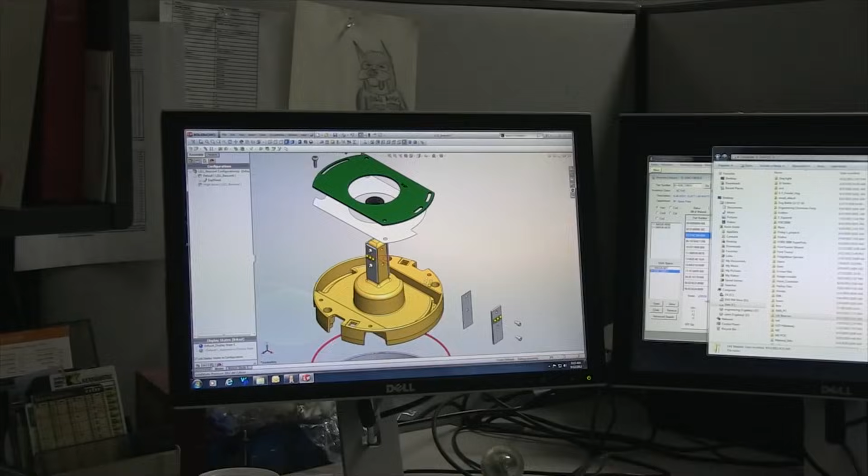Today I'm going to be looking at this particular part right here. The vendors requested a change in fillets to the areas, so I need to import a new circuit board into this assembly. So what I'll be doing is going through the features of this part to modify it to make the vendor's request. Then as I go back to the assembly, I need to match up my circuit board to that assembly and make sure everything fits fine with his requests.

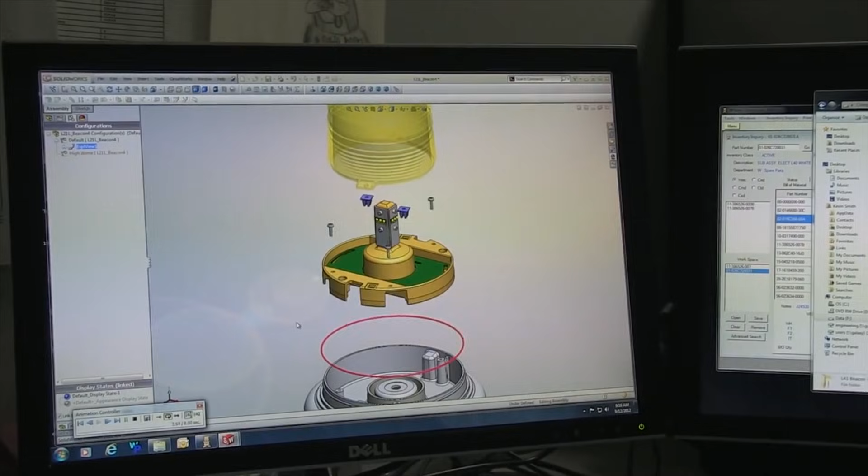So basically you'll generate these drawings and then send them out to, what are you saying? We generate the drawings, we generate the 3D file, then we send that to our tool shop and they actually make the tool for the product. Once we're happy with the tool design and the tool, if it's a die cast part, we don't do die casting, we'll send that tool to the die caster. Right, and they'll actually put it together then. Yeah, they'll make the changes as requested, but the original design came from here for the tooling.

And we can also relax the part so we can show it folded and flattened. Then we provide that to our sheet metal fabrication facility, and they can do the flat pattern layout of that so they know where to make all their cuts, where the bends occur, and then we can again show it in formed state. That's what we're working on right now.

This is exactly how the PC board will look before it goes to the board manufacturer. You're putting all the different components on the board with respect to how it'll be positioned for the tracking. That's true, that's very true.

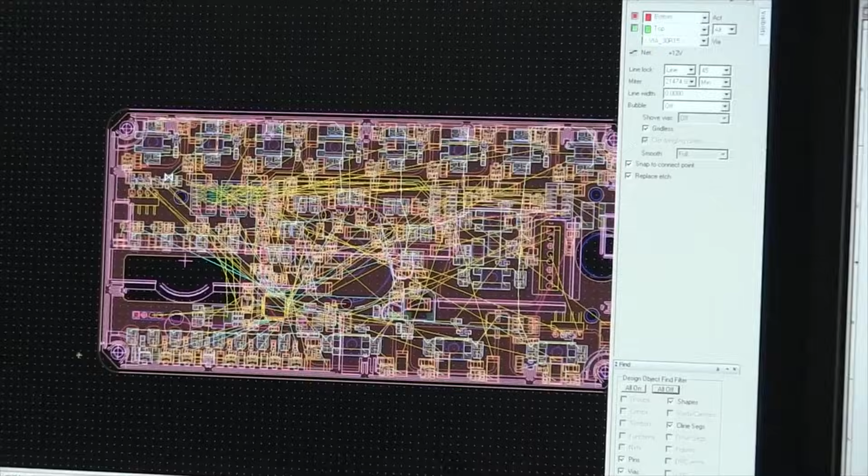So this is the actual component that has come out from the 3D printer.

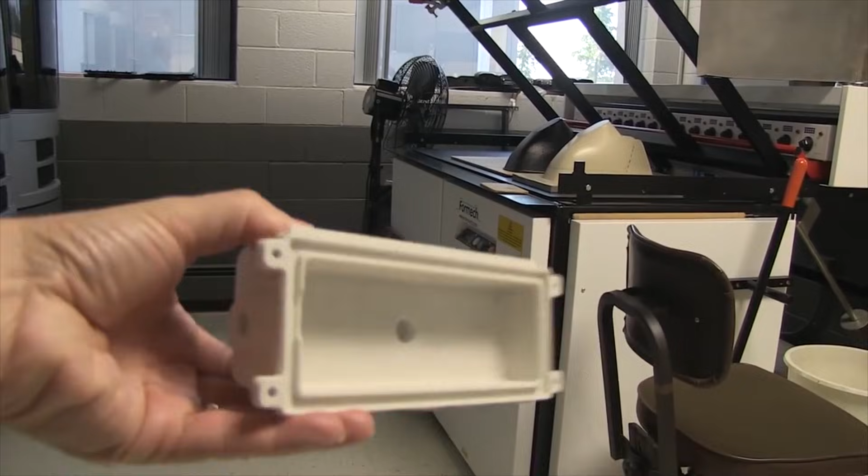And that then in turn goes into this machine over here. They're two separate machines, that was just a view of the powder for you. So basically what it does is it prints a 5,000th layer, scrapes it off, puts down glue, puts another 5,000th layer, glue, another 5,000th layer, so it keeps building this part up. You can imagine the part just being built layer by layer, 5,000ths at a time.

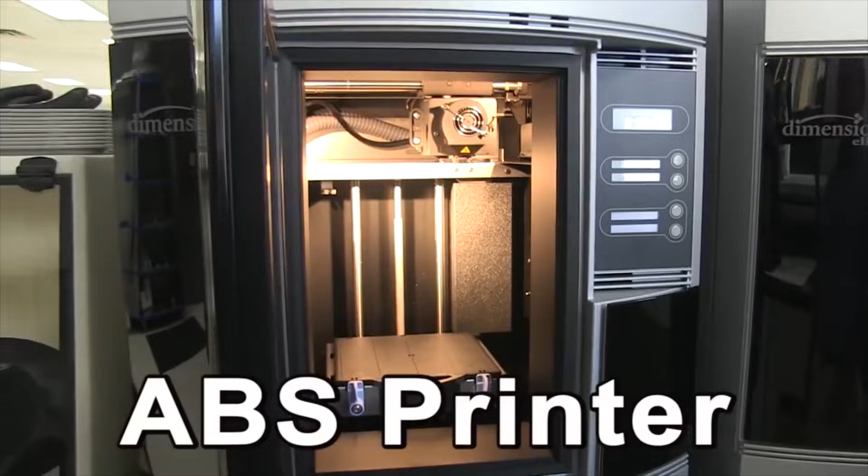This is a life test room. So basically in here, we're testing the longevity of every single Whelen item. We test to see how long LEDs last, how long circuits last. Some of the stuff's been on test for 10 years - some of these have been running for 10 years constantly.

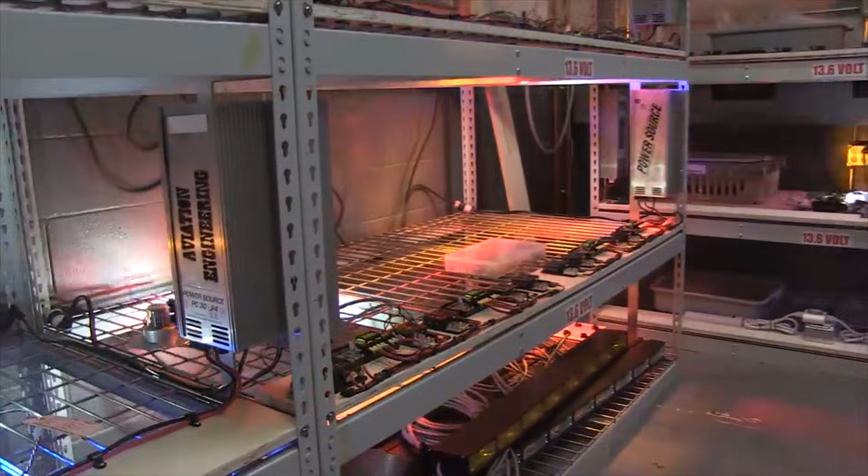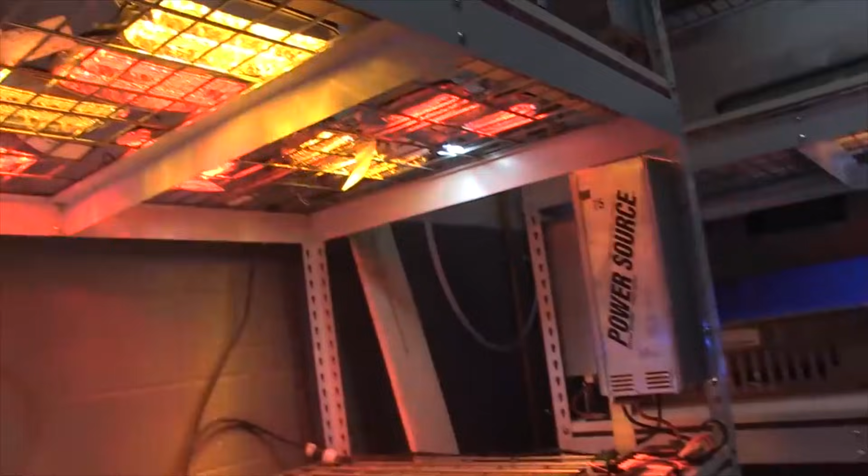Okay, this is an integrating sphere. It's used to measure the color and the light output of the light source. We can measure in infrared or in the visible spectrum.

And what type of product is in here right now? What do we have in there? That's just one of our circuit boards - I'm not even sure, it's one of our LEDs.

You're measuring, as I just said a moment ago, the blue, is what you're going on? Yeah, here's the data for it. So on this graph here, you're looking at the intensity or power versus the actual wavelengths, covered in the visible spectrum. And this chart here will show you whether or not it's compliant to any of the CIE colors - these boxes right here, and it shows that it's in the box. Not directionally, since it reflects everywhere you gather every single bit of energy. That's kind of cool.

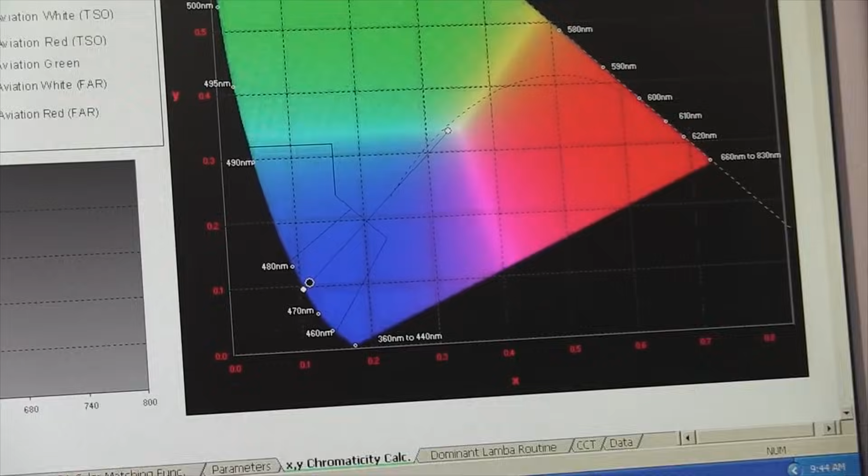All right, this is one of our photometric chambers. We have a light set up in here right now, it's one of our light heads.

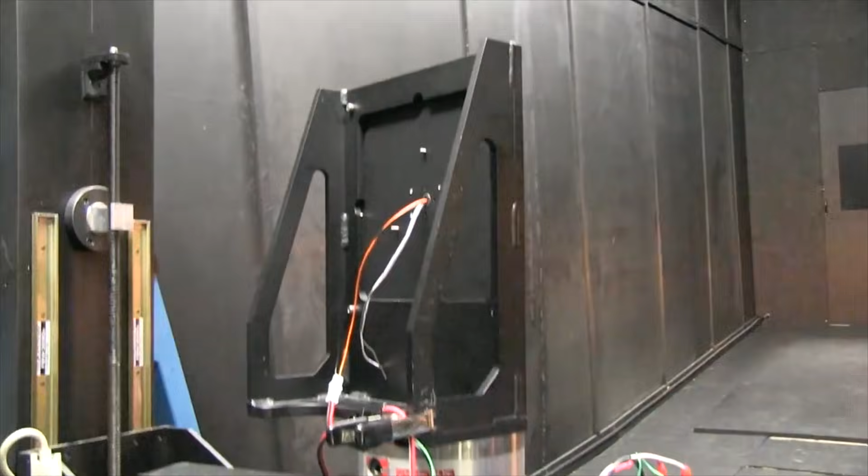This is a goniometer - it's a positioner, and the light is mounted. There's an X and a Y axis, and the center of the light source spins about those axes, and the detector is 100 feet away through those baffles. So we're measuring the light intensity versus angle.

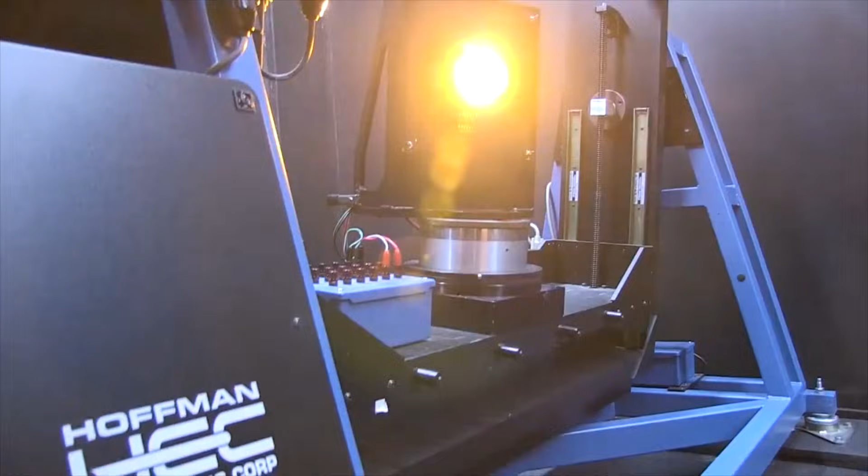Standard environmental control, humidity, temperature, all the environmental controls in each one of these. So in other words, this room is certified with respect to the testing that's going on here, and there's very strict rules on the certification. So this is what we're seeing here on the computer screen of what we've just been looking at inside, and it's toggling back and forth.

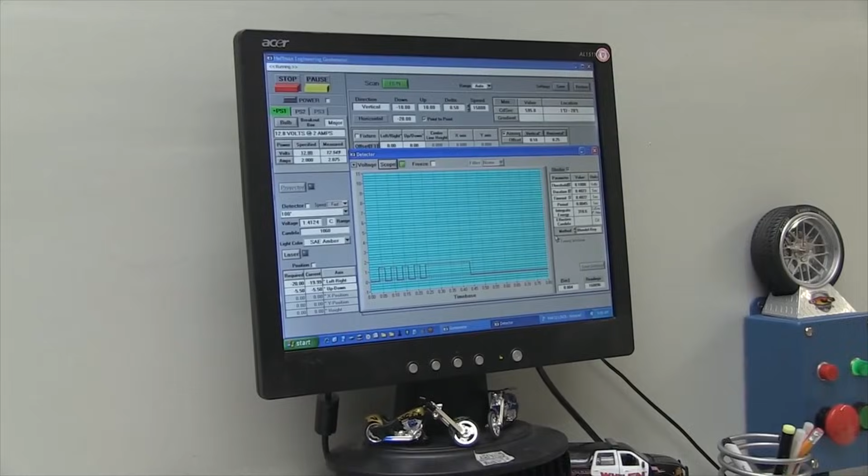This graph right here, the line graph - that's going to come back. Right there is the intensity versus the angle. And then this graph is similar to an oscilloscope, it's measuring the light intensity versus time. So you're actually seeing the wave of the flash.

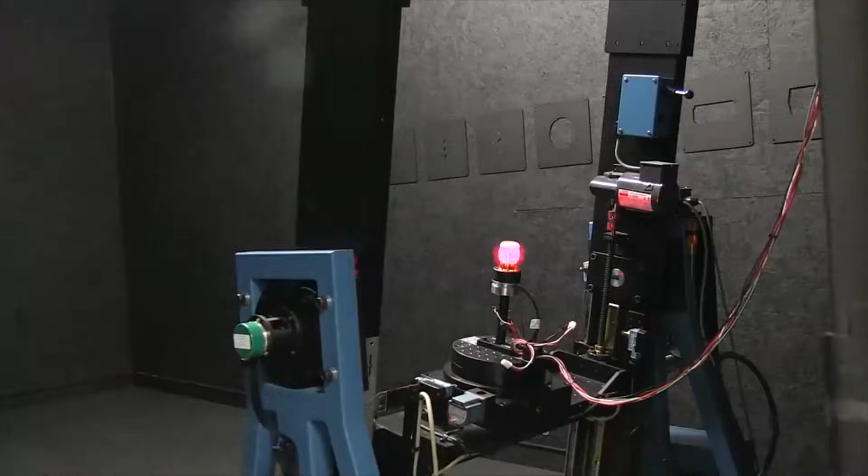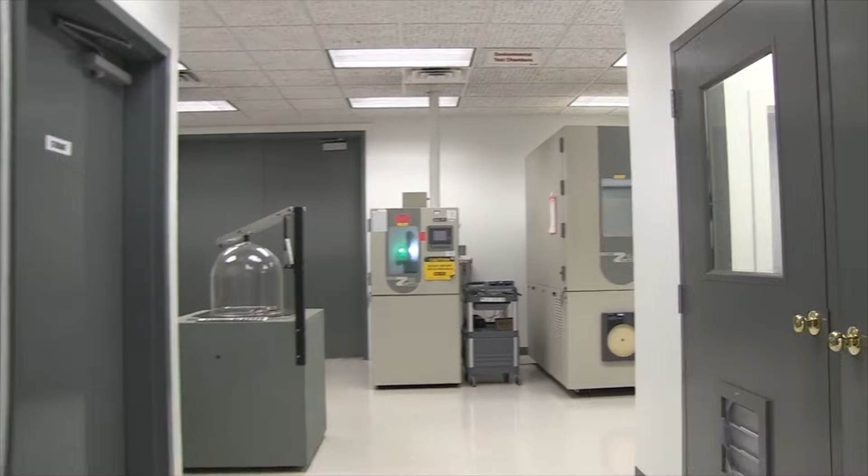So we're down in the underneath section here at Whelen, and we're going into the other test area. Now this is where they do environmental testing - there's a whole range of equipment in here. We'll take a quick look at some of these right now.

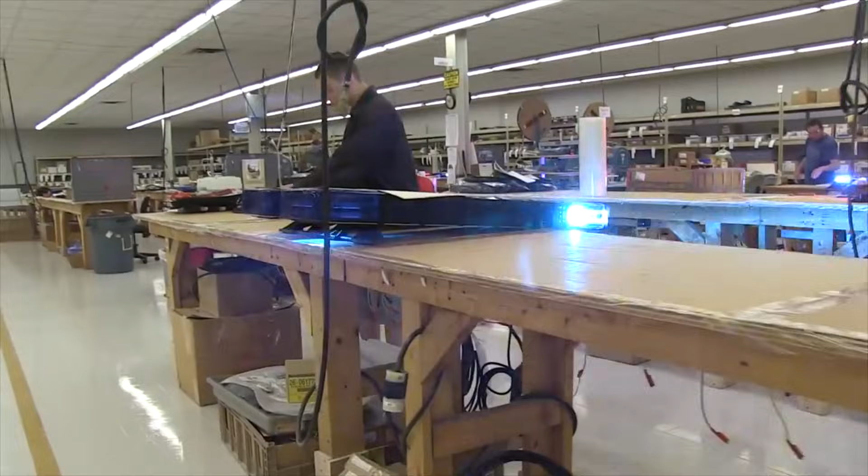So basically down here, this is the light bar production area at Chester. This is where you make runs less than 50, because obviously up at the New Hampshire plant, you make runs over 50.

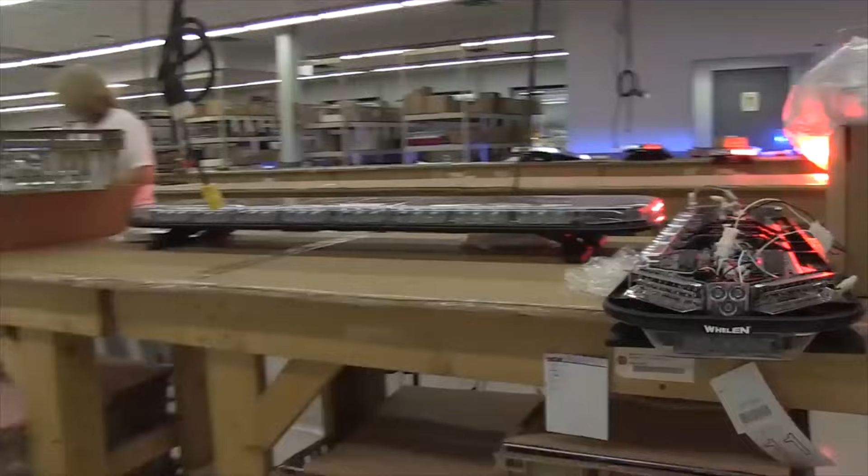Justice bars - so again, all the justice bars being put together here for a particular client, and then obviously out the door they go after that.

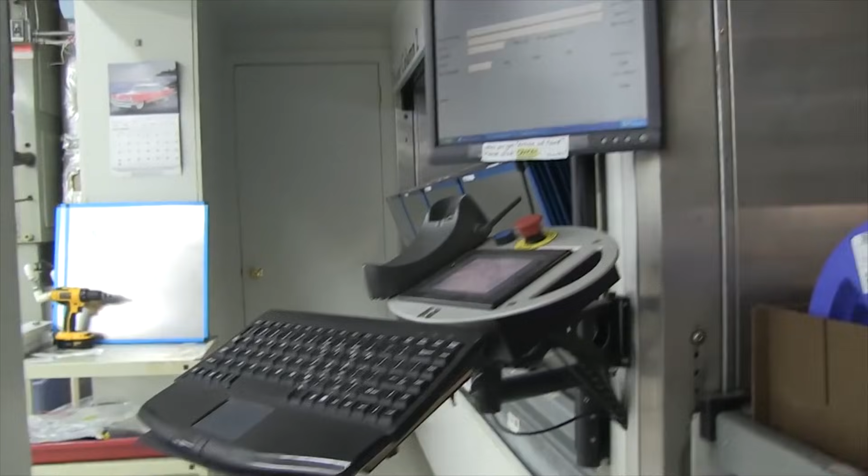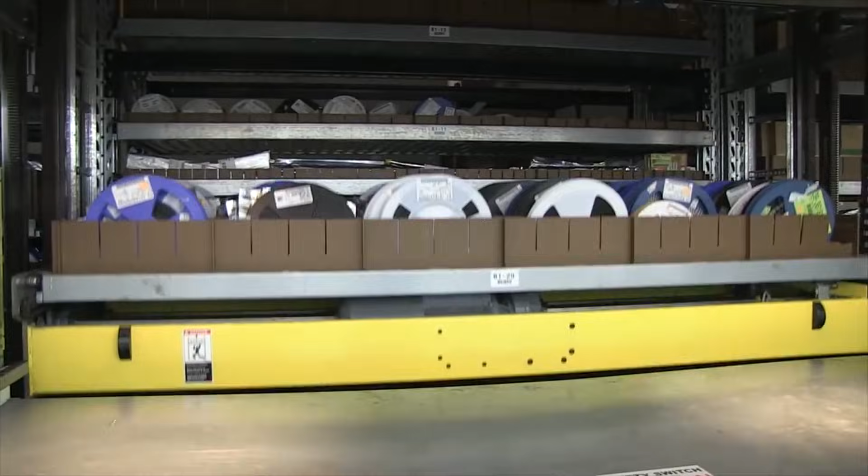Program here what you need, and it pulls it down from the rack. Yeah, you just scan a part and it goes in our system, and we'll bring up whatever we have in stock of it. We hit it, it'll bring it to the best location. It tells us how many quantities there are, different bins - very organized.

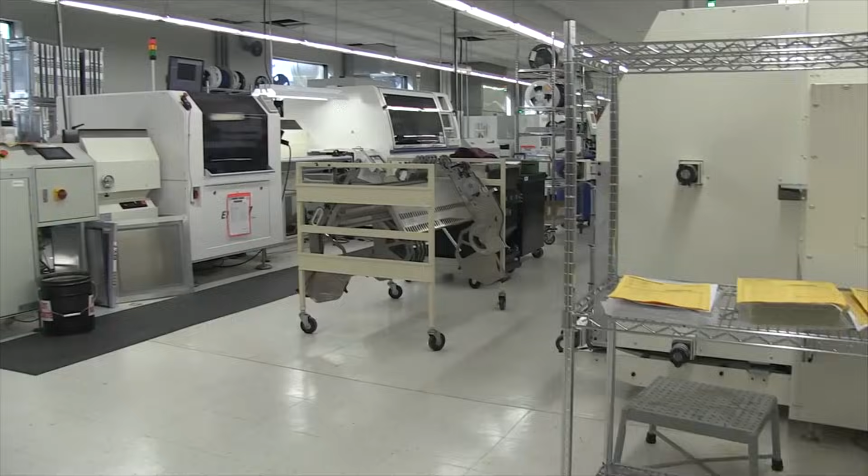So this line is all new? This one's a little older. This one just got replaced - brand new.

So this is the repair department and customer service.

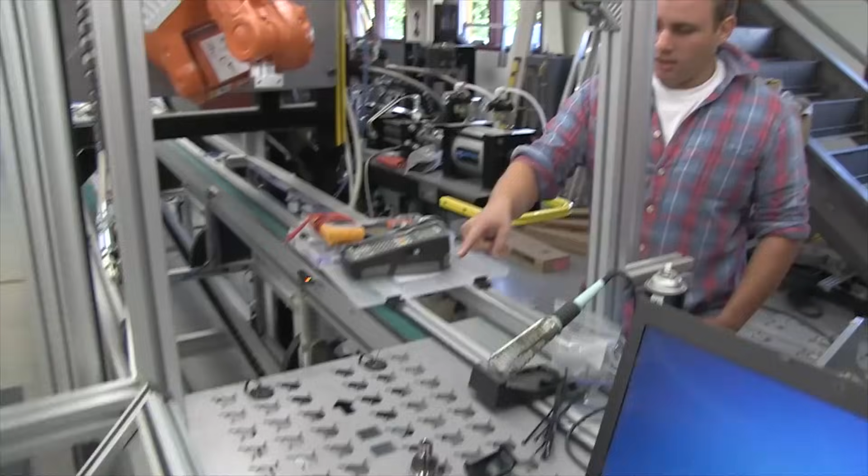These are for the Vertex. Right now we're using UV cure material, but we're changing it up a little bit. It's going to come through here. We're using these PVA machines now with a 3-axis type setup, like a box. We have one in here.

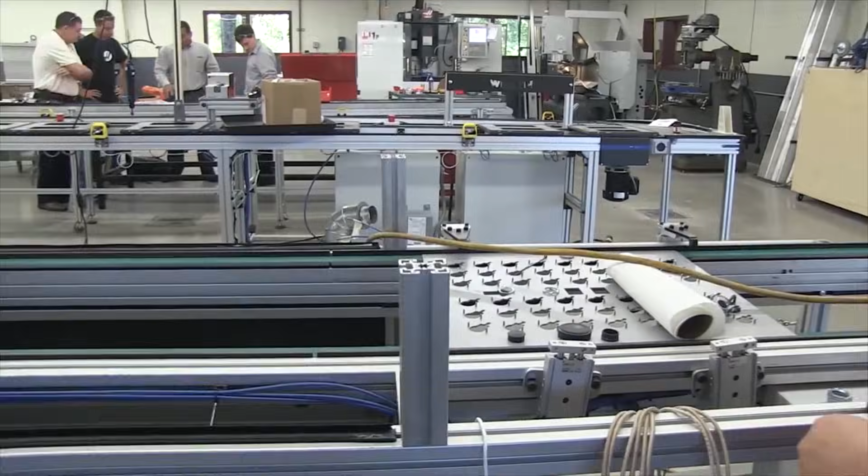It fills in, fills the back. So it's actually the same stuff we use in the PTWs.

The other robot will come along. It's brand new. We've only had this a few months. It's the only one - there's only 2 of them in the country.

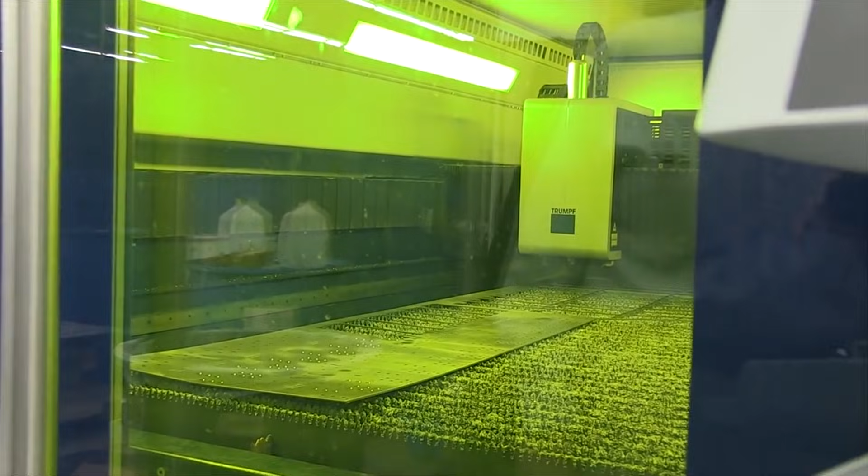So what are we having done over here, John? Same thing, going there. Yeah, we have duplicates of every machine in the place, in case one goes down for maintenance, we keep going.

The lasers I showed you at first will not do tapping and punching - that's just flat sheet cut. This is where we have to punch holes, tap holes, and then cut them out. So it does 3 operations.

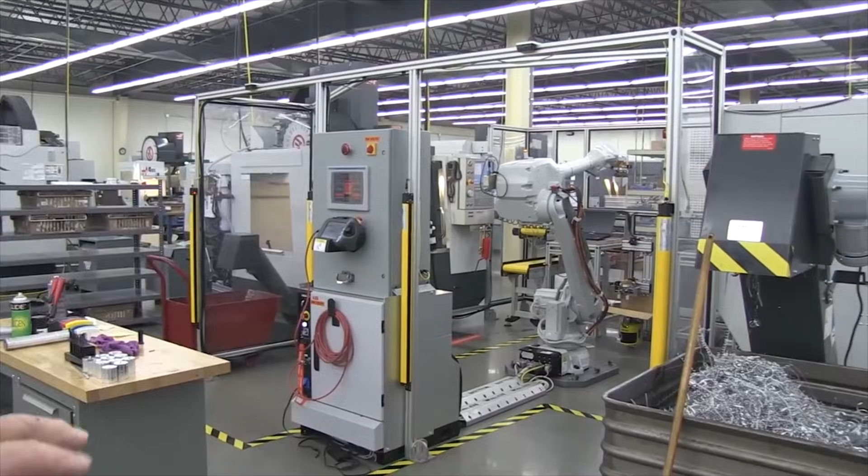Here is a creation of my engineers. They mounted a robot between a lathe and a milling center. It takes material, comes into the lathe, does its thing, cuts it off, the robot puts it in the milling center, it does its thing, it's all done. And it goes out the conveyor and we can use it right away.

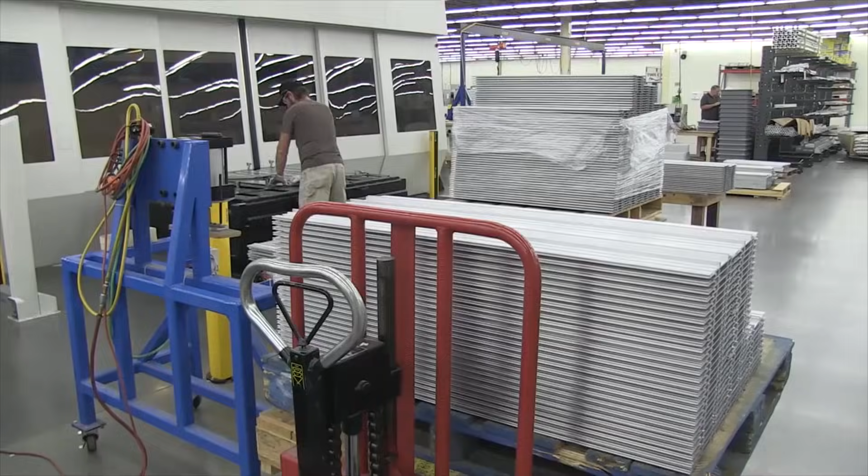And that runs all weekend with nobody here. When it opens up, this does all of the light bars, bases. Punch all the holes in it? Cut the holes - that way we don't have to keep greasing.

You can walk in there.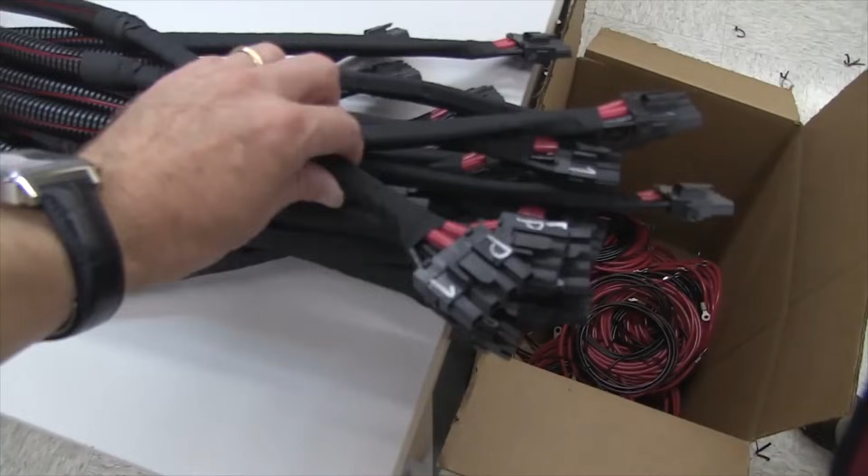Not exactly how many, but they're gradually showing up more and more.

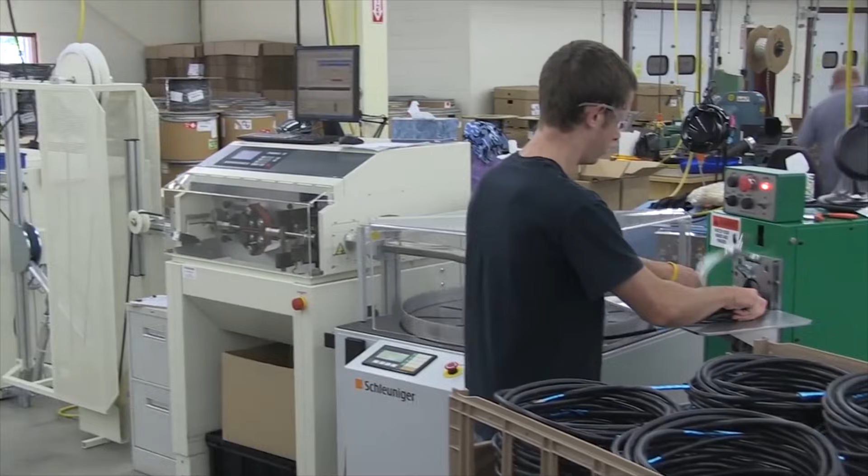There's a lot of things that are no longer - you just can't do things like this.

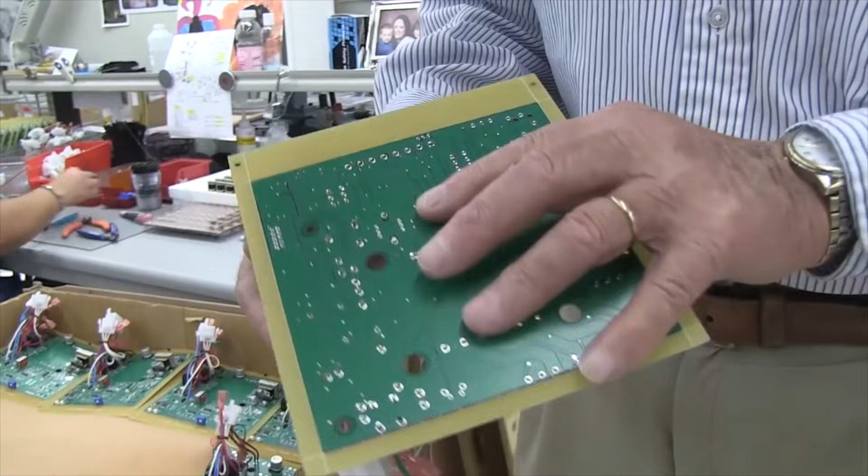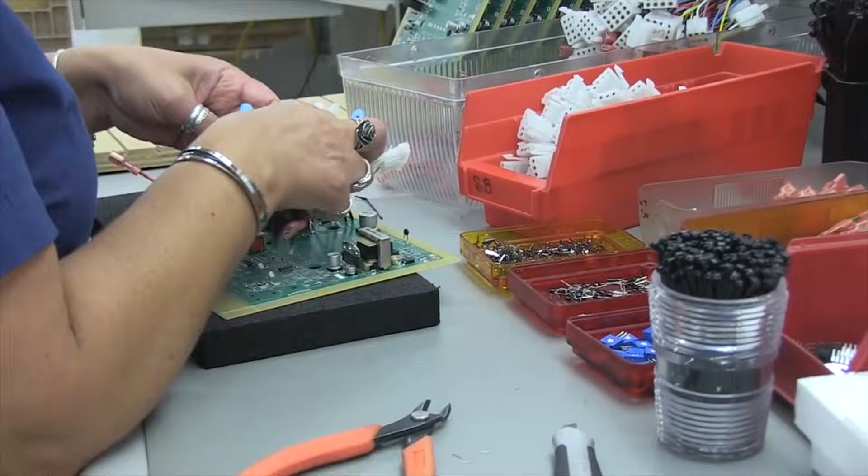Do you make your own PC boards? Yes, right over there. A stack of PC boards goes through this machine here, and it silk screens, so to speak, prints on the solder location.

Puts the solder paste on - very thin. Then it goes down and it goes into the insertion machine.

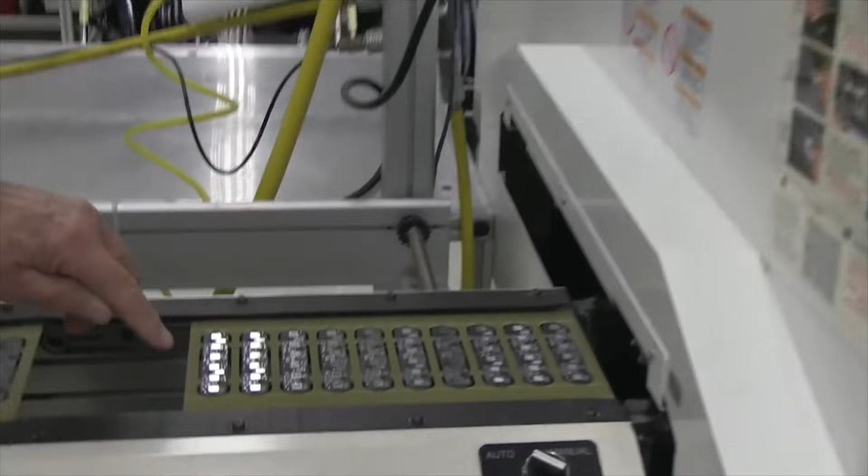This has already been pasted on those silver blocks. Then it goes down here.

And this machine is picking up, called a pick and place machine. It picks the part off the reel and puts it in the right spot. All programmed - we can do up to, well, you can see how many reels we can put on. I think we can do 40 in each one, so we can put a lot of different parts on before we have to run the board through a second time.

And that's the component parts there - the diode or the resistor or whatever. Yep. The only thing this machine doesn't do is what we call power parts, because they're the big parts, the big wires.

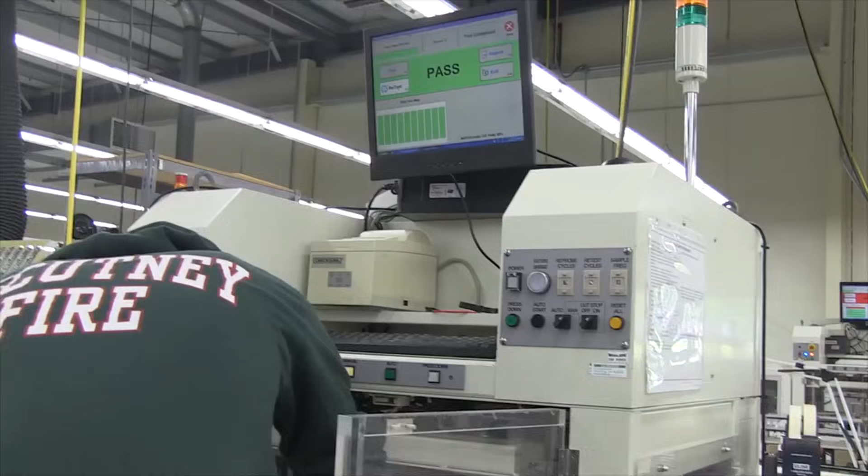Yeah, go ahead. See a little bit better?

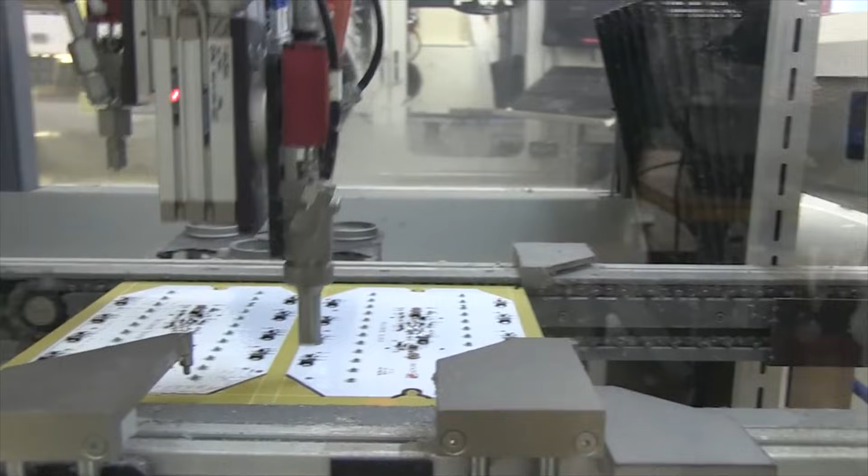That's spraying or coating, just to protect the coating. It's the goo machine. Then it goes through an RF oven and out.

RF - radio. You can see the coating from this angle. Right, it just goes into the big thing.

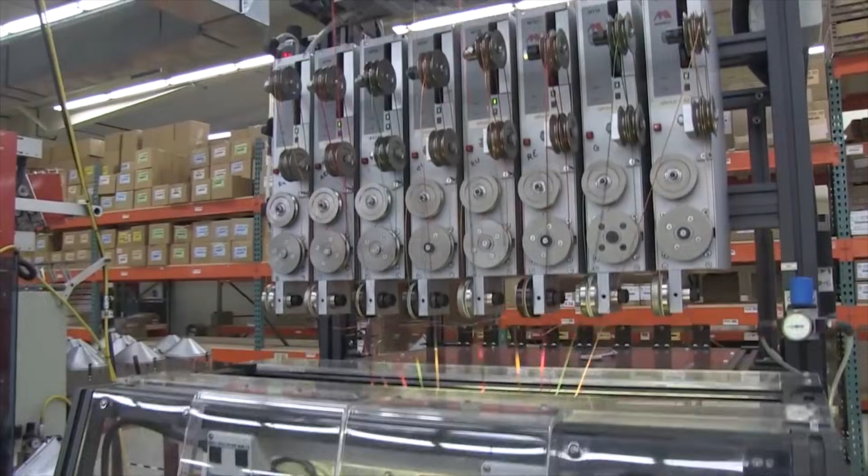Just to identify the coils. There's multiple - in this one here, there's 4 or 5 different coils in there. One live coil, one power coil, one control coil.

Can take it out. Thank you.

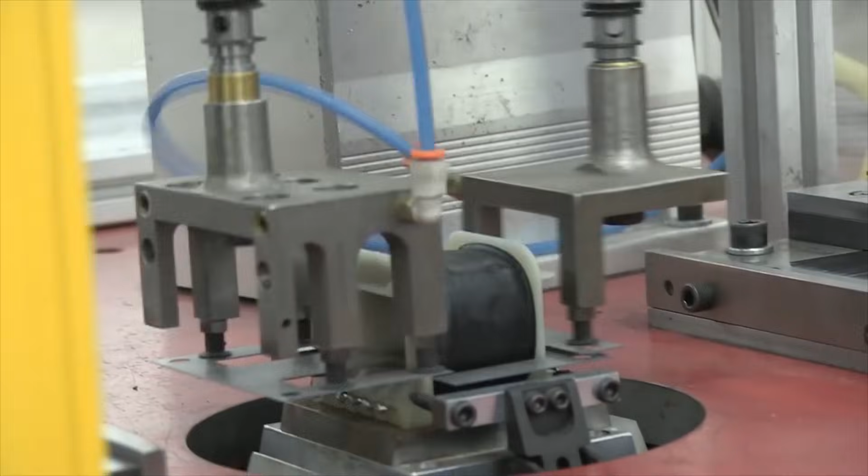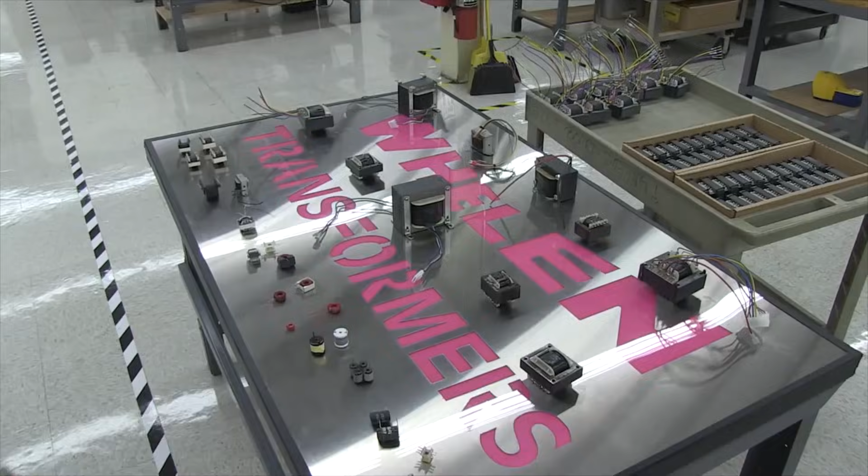Here's the tiniest one we make, and here's the biggest one we make. We're also making toroidal transformers, and I'm not sure anybody else in this country makes them. So we have a toroid winder.

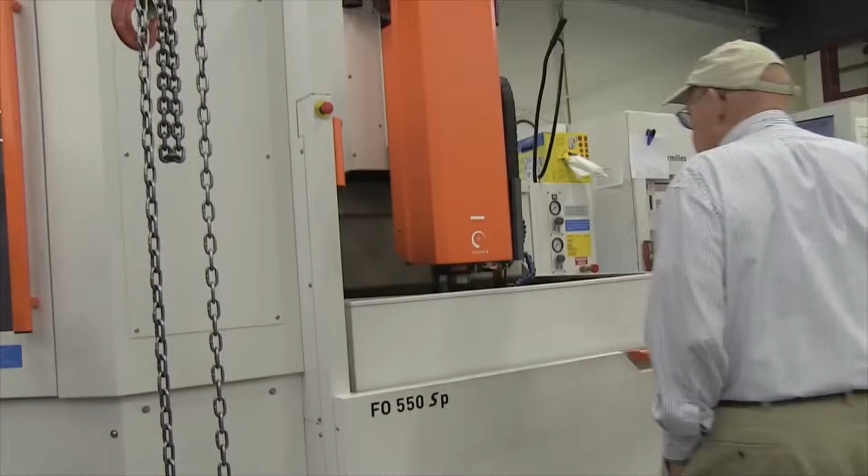Moves up and down, and it burns whatever shape you want. Yeah, I want to do this exact shape, which would be difficult to do otherwise.

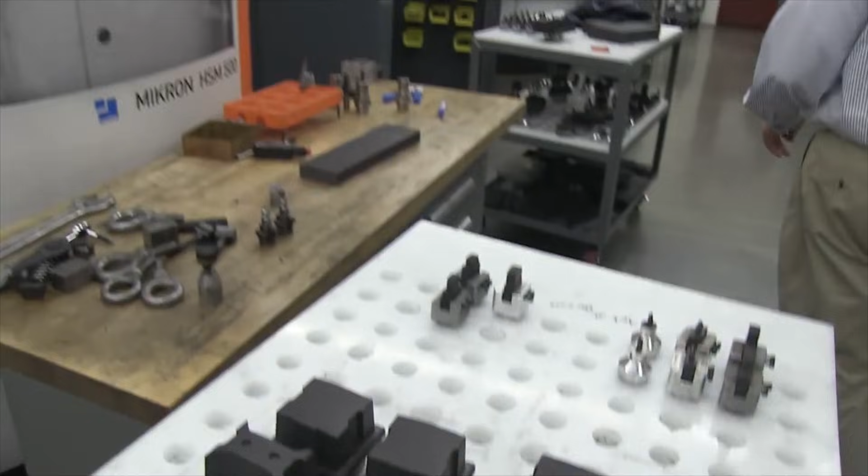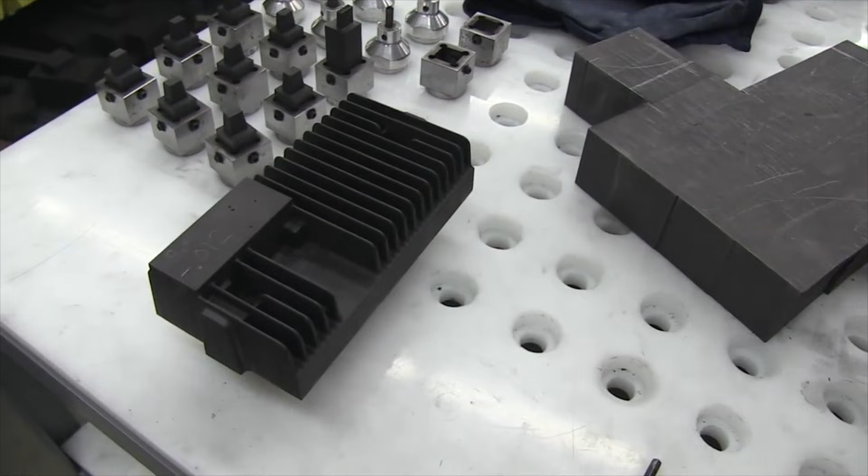So you rough them a little bit, then you sit in there and 24, 36 hours later, it's burned out. And you cut the stuff out of carbon.

This is one that uses the brass wire - miles, hundreds of thousands of miles of little fine brass wire, and it cuts like a saw, but electronically. Best description I can give.

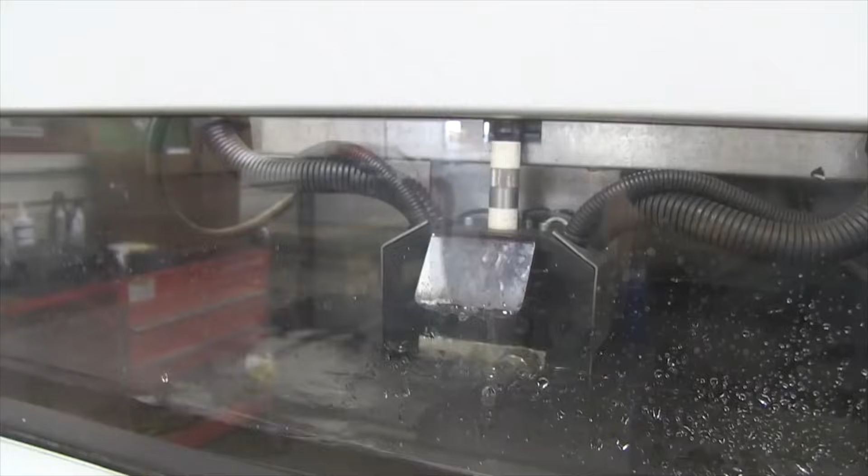We make our own die-cast mold here. All our own die-cast mold. This is the grinding shop.

In here they do the few thousandths of an inch worth of work, making sure the tools are incredibly accurate. Checked out, repaired, and then it goes back with a green tag, back on the shelf. So a guy goes over, gets his order to run a certain tool, he knows it's ready to go, rather than thinking, oh my God, I can't run it today, I gotta get it fixed.

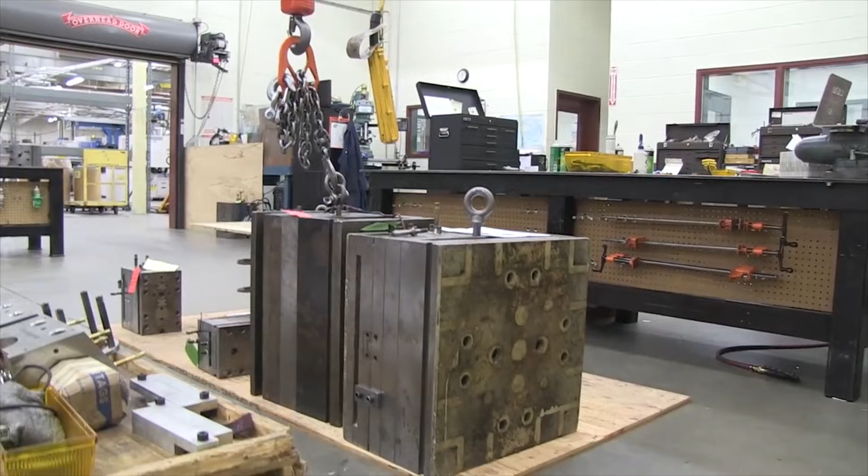And when they take it out, they open it up, find nothing wrong. Be able to recognize that tool. Yep, yep, that's a vapor type.

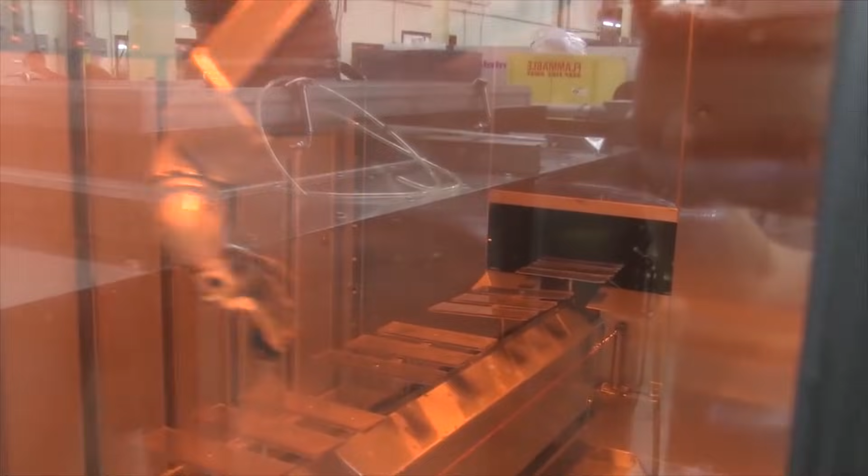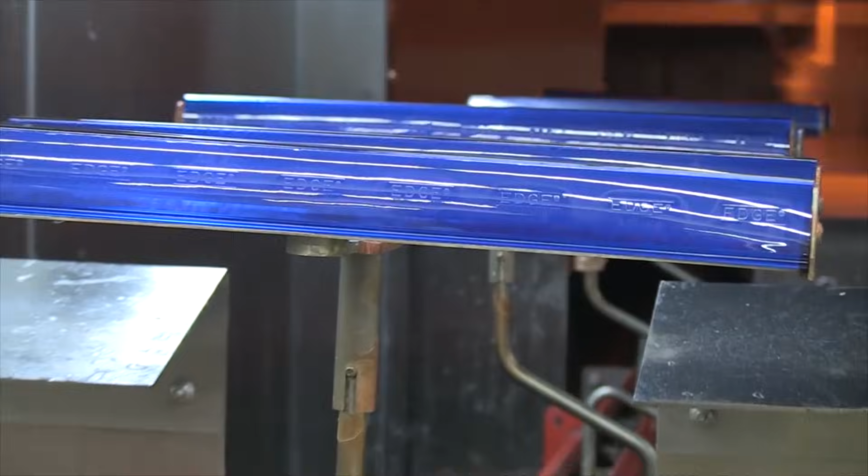Barrel of material, 25 gallon drum. Every drop is recovered. Oh yeah. So it's rolling away to the bottom, recycled.

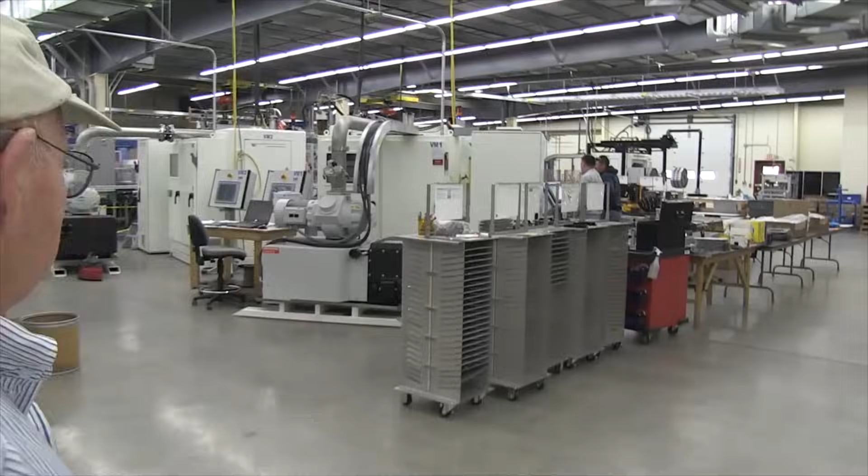What we have here, Stuart, we'll walk around, but this is an automatic reflector line. There's 5 injection molding machines making parts. The robot takes the part out of the machine, trims it, whatever, drops it on a conveyor, comes down here, lines up properly.

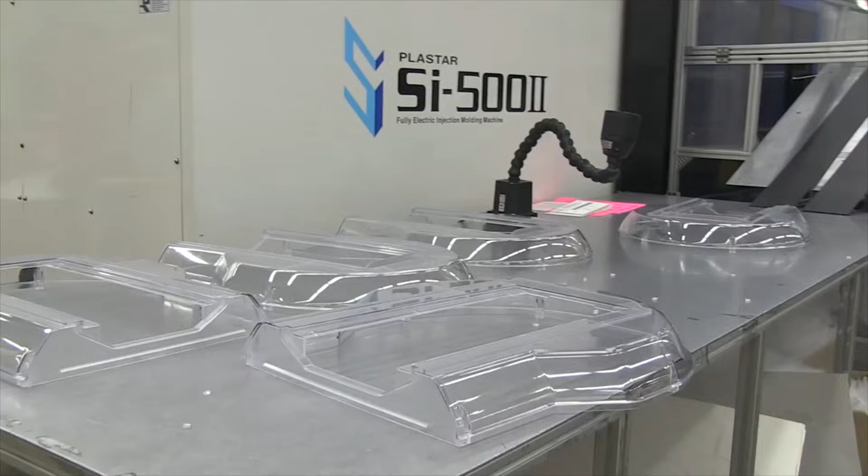This particular area here is where Whelen keeps all of the respective dies to manufacture all of the different beacon dome assemblies that they need. It's absolutely vast.

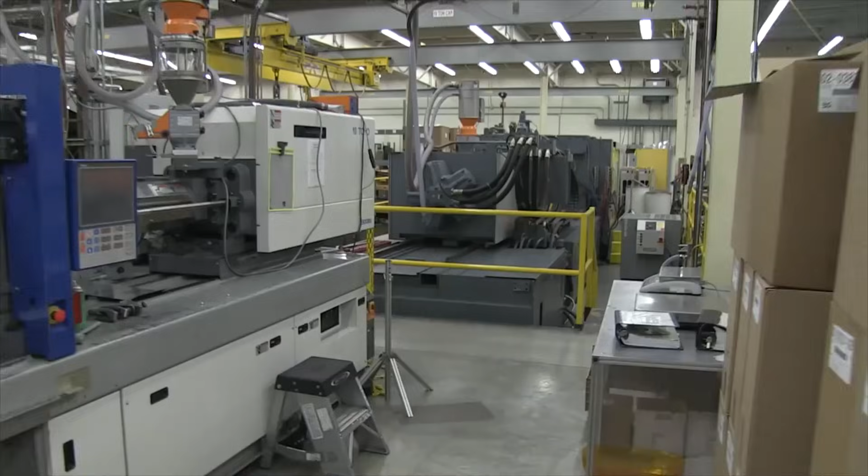Great one. Now what's this press used for? That makes shells and books and big parts. This is a total of 700 tons. 1700. Actually, they call it 2,000 ton machine. Now, tonnage is the clamp force.

Gone through this vacuum metallizing system, and this is what it looks like.

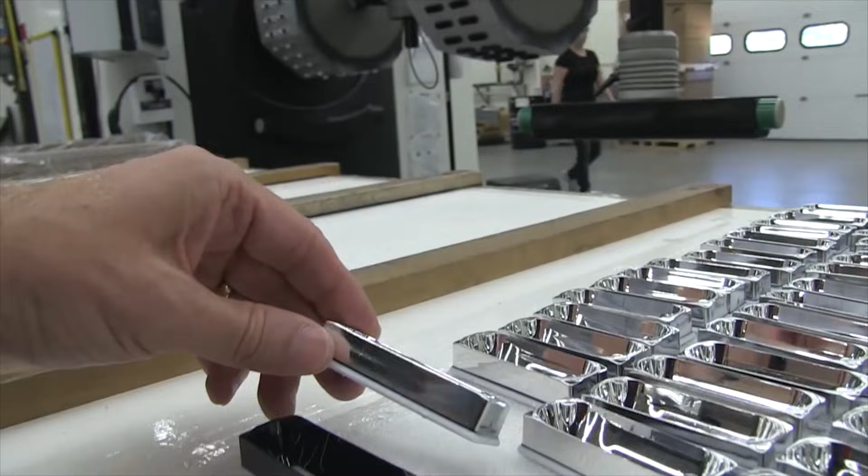Well, there you have it, a SIRENNET film of the Whelen facilities, both in New Hampshire and in Connecticut in the United States. Now, of course, Whelen didn't start as the mega corporation it is today.

It started as a very small family-run business. It's still family-run, by the way. But George Whelen and his wife Betty, in 1952, started a very small business out of a garage in Deep River, Connecticut, making aircraft warning lights. That's how they started. George, under some persuasion, decided to put that aircraft warning beacon into the police market. And as I say in the classics, the rest is history.

So they moved from that small garage to a larger facility in the 70s, also in Deep River, Connecticut, and then ultimately to Chester, where the large plant is today. That also, by the way, includes an airport, because they have outdoor warning, they have aviation, and they have automotive.

Of course, you also saw the footage of the New Hampshire facility as well, which they started back in the 80s. Now, George, alas, did not live to see all of this grow into what it is today, and his sons have taken diligent care, along with everybody who works at the company, to make sure Whelen is a proud name in the automotive warning industry.

So I would like to thank many people at Whelen for letting me have a look around their factory. But before I go and do that, let me tell you a little bit about the size of the place. The Whelen facilities combined, that's the New Hampshire and the Connecticut facility, is 900,000 square feet between those two factories. They actually take up a total of 50 acres.